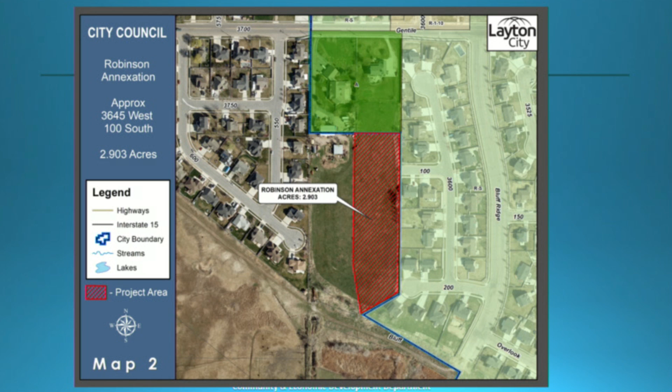Any other questions? Okay, seeing none, this actually brings our consent items to a conclusion, so I'll look for a motion for adoption of the consent items as presented.

Madam Mayor, I'll make a motion that we adopt the consent items, which include Resolution 20-21, the adoption of the City Municipal Wastewater Planning Program Report, the bid award for the Kays Creek DNRG Trailhead, and the Robinson annexation, which is 2.903 acres. Second. Okay, it's moved and seconded. All those in favor? Aye. Okay, thank you very much.

Okay, with that, we'll go ahead and move into our public hearing portion of our meeting. And again, Mr. Wilkinson will be presenting that item, which is the plat amendment for Gentile Station subdivision. Thank you, Mayor, Council. This is a public hearing. I did want to mention at the beginning of this hearing that the applicant is not in attendance tonight, but he is available by phone if we need to have any questions answered, and is viewing this through the broadcast.

This is a request for an amended plat, which requires a public hearing before the City Council under this circumstance. This is a development that you've seen probably as you've driven on Gentile that's going forward. As the development moved towards building permit, it was noted that there were some discrepancies between the plat and some of the architectural designs for the buildings. The applicant has come into us.

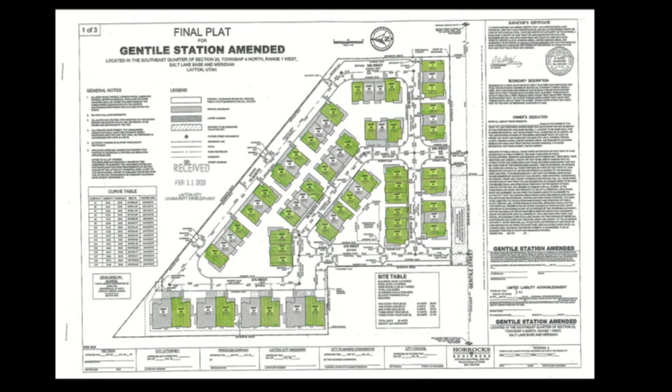Okay, I'm going to look back to our technical team and see if there have been any other additional questions that have come in, or any questions whatsoever regarding this Gentile Station. Okay, very good.

Council, are you comfortable with closing the public meeting and making a motion on this? If so, I'll look for somebody to take some action. Madam Mayor, I make a motion that we close the public hearing and approve the plat amendment for the Gentile Station subdivision plat amendment, approximately 280 West Gentile Street. Second. Okay, it's been moved and seconded. Since this is a public hearing, we do need to take a roll call vote.

So with that, I'll start with Councilman Thomas. Yes. Speaking to the mic, yes. Okay, Councilman Morris? Aye. Councilman Fitzpatrick? Okay. Councilman Bloxham? Aye. Councilman Day? Yes. Okay, thank you very much.

So that concludes our regular council meeting. However, in our prior work meeting, we agreed to - wait, before I say we need to, Gary, do we need to close the council meeting before we go back to our items on the work meeting? We do, right? Speak directly into the mic. Thank you, yes, go ahead and close your regular meeting and go back into your work meeting.

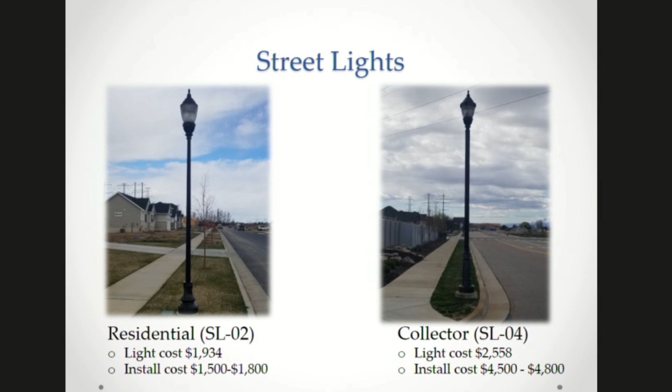As I was saying, the install costs on our collector streets is substantially higher, and that is due to the amount of conduit that we run. A lot of the residential lights, it's already in a subdivision. There's power in the park strip, and they're direct connect lights, we call them, so they don't actually have a meter to them. Rocky Mountain Power allows us to connect directly to the power on each individual one. However, on our collector streets, there's substantially more conduit, more wiring, more equipment that gets installed with each one of the lights, and so that actually drives the cost of the install up quite a bit. The install cost isn't just the wiring and everything, it's the actual work that the contractors we hire do in order to make those connections.

So we do have a couple different lights as well. The one on the screen there, the SL-03, we call those our specialty lights. You'll see those down on Main Street near the UTA train station at Layton Parkway. They're quite a bit of money because they actually have two fixtures on the top of that head, so it doubles the cost of the fixture. They run about the same cost as our collector roads, as well as the arterials. Those are the ones you see on Layton Parkway and some of our bigger streets, the teardrop design, we call them. Those lights are $3,800 a piece, basically because they're a larger light with the mast arm and things like that.

So I want to go on to— Can I ask you a quick question there? Yeah. How are they metered then? So on the lights that are part of the— sorry, I've got the auto advance going on here. Let me turn that off.

The way they meter them is we design these systems, then we'll have a meter, an actual power meter, that is installed with the lights. Those lights will be daisy chained together, they call it. So we'll have one meter that will power the lights for an entire section. Maybe from Angel Street out to 2200 West or something would be on a single meter. So sections of lights have different meters at different locations.

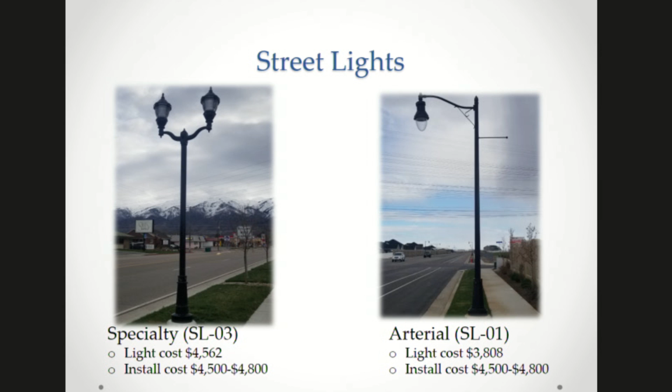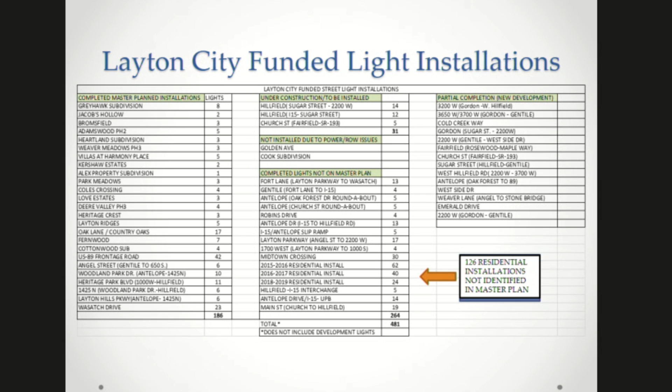I wanted to go over the residential master plan lights. We had the list for year 1, 2, and 3. These are the only listed residential streetlight projects on our list, and of those, only 9 have not been installed. Golden Avenue was not installed because of right-of-way issues where we don't have the property, and we haven't pushed that issue yet to try and purchase that right-of-way. The Cook subdivision has different circumstances. We felt like we've done a pretty good job installing the lights on the master plan in the residential neighborhood, and we also added 126 other lights that were needed throughout that area.

Didn't you say those 126 were not installed?

No, they were installed, but they were not on the original master plan. They were specifically put in as a project for residential install lights, so that we could get those into places where there were not lights or adequate lighting identified.

I was going to show, I have a spreadsheet, and we've gone through the list of projects. There's quite a few projects. Sorry, I've got to get used to standing at the mic here. There's quite a few projects we've done and completed that are on the list, and quite a few that were on the list for roads like Gordon Avenue, 3200 West, and 2200 West, where the development has not occurred yet.

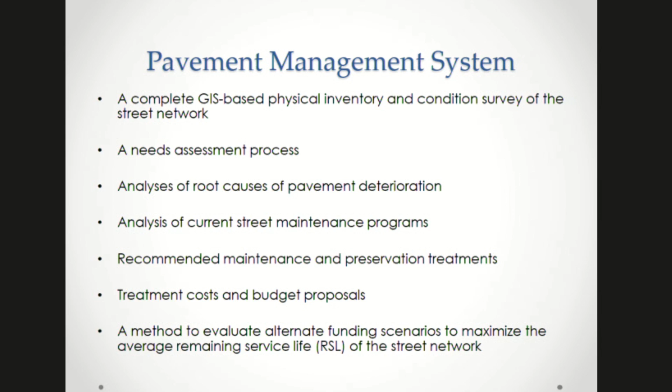So just a little bit of FYI knowledge for the council and mayor: the functional classification of our roadways, or what we term our roads - we have about 20 3/4% arterial roads, 7% collectors, and almost 73% of our roads are considered local roads. That's important because the treatments on our arterials and collectors are vastly different from our local roads. Local roads tend to sit and bake in the sun and don't see a lot of truck or heavy traffic. But our arterials and collectors carry a lot more volume and bigger vehicles, so they get a little bit more of a beating, I guess you would say.

Conventional practice was that you do a preventative maintenance treatment and rehabilitative treatment on the roads during its 20-year service life. If you did nothing to the road and just let it sit there, they would consider that you had 20 years of service life left. But if you do these preventative maintenance and rehabilitative treatments, you can extend that 20 years out into the future and save a substantial amount of cost, because the most expensive treatments you have are reconstructions of the roads and basically replacing the pavement structures.

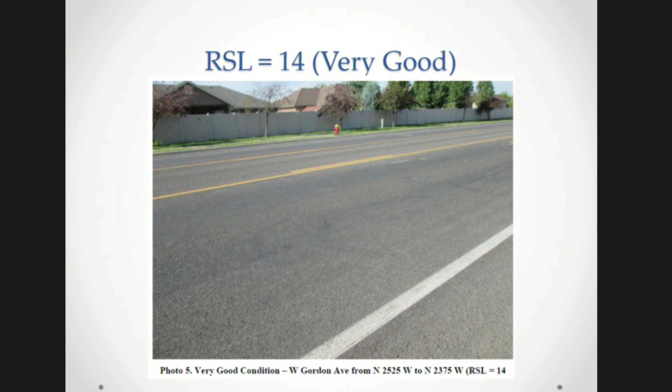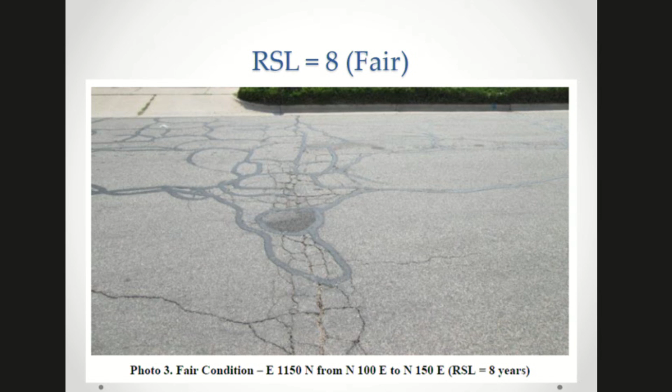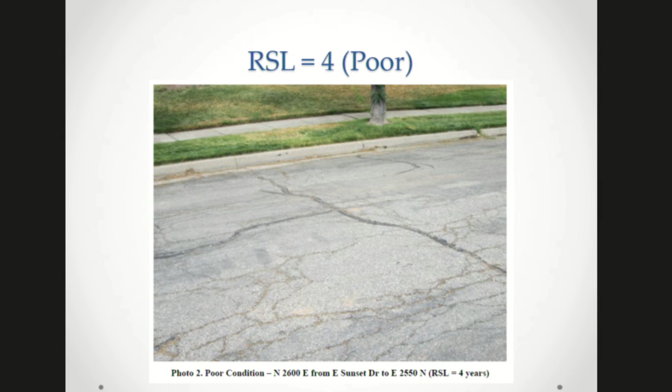This is considered fair. I know it doesn't look like it's fair, but structurally, you can see there's kind of that problem in the middle there, but the remaining pavement around it is not really deteriorating and failing at this point, so there's some treatments you could do to fix that. Now, up there on Sunset Drive, this is considered a poor road. It has a remaining service life of 4, mainly due to all the cracking and the fact that it's not sealed, which has caused some of those cracks to propagate and be a problem. And then this would be considered a failed road section.

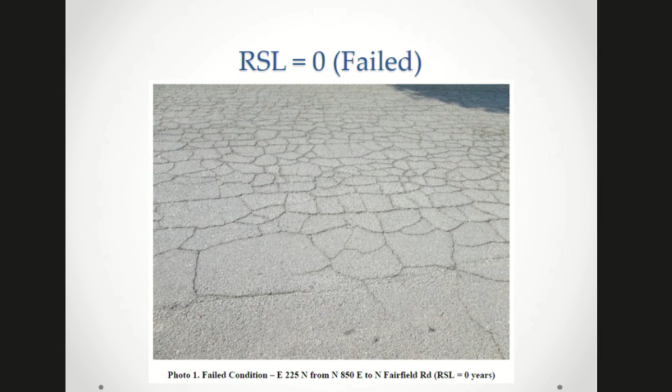You can see all of that. We call it alligator cracking, but that's a fatigue crack that's basically showing us that the road has lost its structural integrity with the base and the pavement. And the other thing I need to point out is just because you get to 0 doesn't mean you can't drive on the road. It just means that for the purposes of our assessment, the road has met its usable service life, and the treatment at that point is a reconstruction and a brand new surface being placed on the roadway.

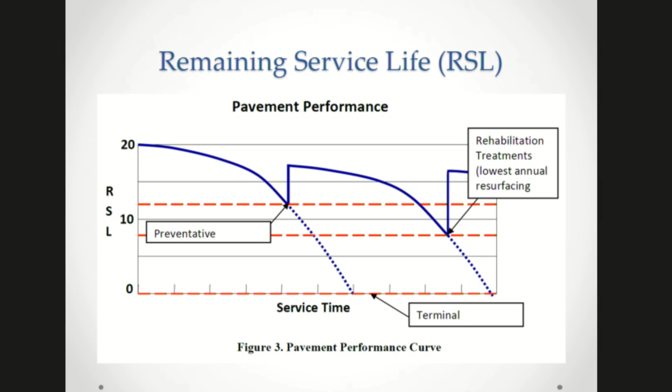Why do we do pavement preservation? As you can see, the blue line represents the performance curve of the asphalt. At 20 years, you can see it's good, and then it ticks down. You get down to about 11, 12 on the line, and then you do a preventative treatment. The dashed blue line indicates what would happen if you just left the road to fail. But if you do a preventative treatment, you can push that RSL back up, and you get a little bit more life out of that, extending that curve. Then you get down to a rehabilitation treatment, and you push it back up, so you're trying to do that to avoid those expensive reconstruction costs that need to occur at some time in the life of the pavement.

So again, the RSL is not affected by the appearance. If it's black, it doesn't mean that it's beautiful or anything. It just means that we've had a treatment on it. But sometimes roads sit in the sun and they oxidize and turn a little bit gray. That doesn't mean that they're failed or that they don't have the structural integrity in the road. It just means that sometimes people don't like the look of the road as it sits and oxidizes. But the responsible maintenance program builds around the fact that you're trying to improve that service life of your system overall and prevent getting to the point where you have to reconstruct roads because you've neglected them in an effort to beautify the pavement instead of using it for what it's for.

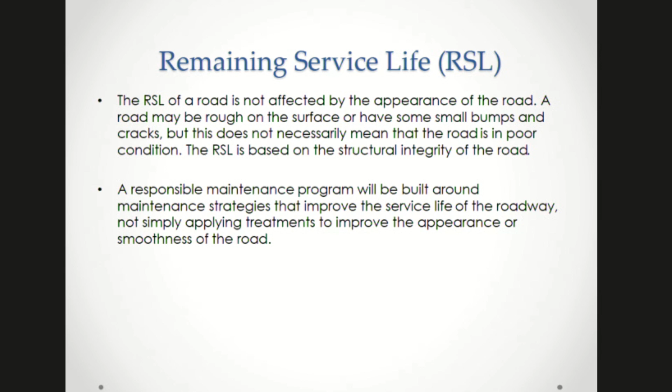The preventative maintenance is our seals and other types of coatings that go on top of the pavement. They don't necessarily add any kind of structural capacity to a roadway, but they seal them up and prevent either the sun from oxidizing and damaging the roads, or water from entering in and damaging the subsurface components. They're about a fifth the cost of rehabilitation, and about a tenth the cost of reconstruction. So when we go out and do a lot of the slurry seals and crack sealings, they're significantly cheaper than having to put brand new pavement down.

Rehabilitation treatments are a little bit more aggressive to try and solve the problems. They are used to add structural capacity to a roadway. So if the pavement is failing due to cracking or other things, a lot of times we will do a 2-inch mill and overlay. That's considered a rehabilitative treatment. They do cost 2 or 3 times more or less than reconstruction, but they're substantially more than preventative maintenance.

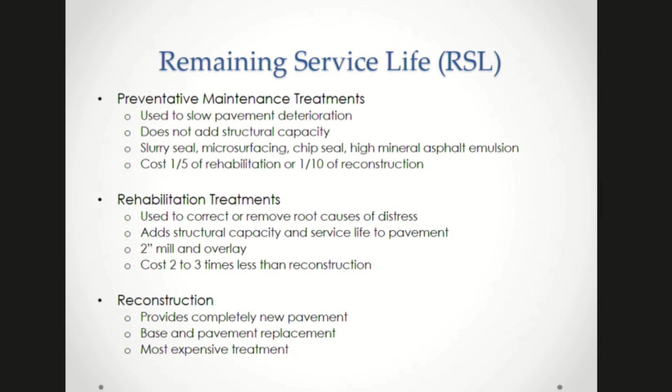And then reconstruction is the least desirable. It sometimes is necessary, but basically you get a new pavement section. You usually have to replace all the base and additional subgrade in order to build the pavement structure back to what it is required to be in order to provide that 20 years of remaining service life, but it is the most expensive.

As you're looking at that list, it's a pretty substantial list. We don't use every one of these treatments because some of them just don't work well here in our area. Some of the climate issues we have don't allow for every one of these to be used. Plus, it's kind of hard to manage that many treatments when we have some specialized contractors that come in and provide pretty competitive pricing for us.

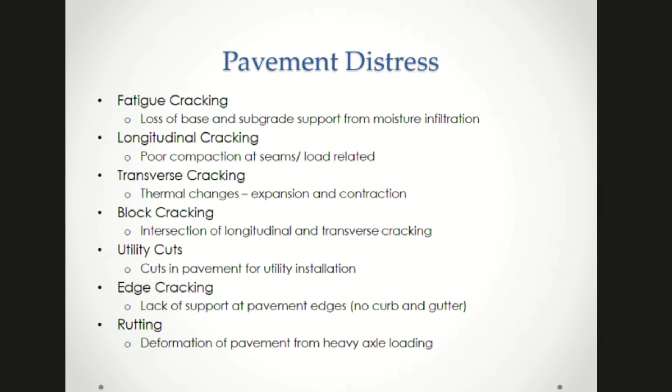I told you guys would get an education on this. This is good. Are we gonna? I'm just trying to keep you awake. Can we get this copy sent to us? Absolutely, the presentation, yeah, I'll make sure Kim has this, and I'll provide you guys all a copy of it. I do have the full report, it's 205 pages. The first 40 is the report, and the rest is all of the... Yeah, hey, it's better than Congress. I'll take page 1 and 7. You want page 1 and 7?

Perfect. So just to tell you how the pavement is assessed, this is the sheet that the college students use, and I'll be honest, as a college student I don't know that this would be that exciting, but it's actually really informative, and it helps you really understand what happens to roadways and pavements as a civil engineering student. They have this chart with all 6 of those different distress ratings on it, and there's a chart on each side. I'm going to zoom in and use fatigue cracking because it's the one that shows up in our city the most.

Basically, the way you look at it is you look at the extent of the fatigue cracking, and you rate it either low, medium, or high, and then you go to the severity, which is low, medium, or high, and it's based on how often it occurs and the size of the cracks. That number on the chart on the right actually equates into an RSL. So if you picked medium extent and medium severity, you'd have an RSL of 6. If you had low and low, you'd be at 10, and if you had none of this, then you'd be at 20. Each one of those different categories has a different RSL chart with it.

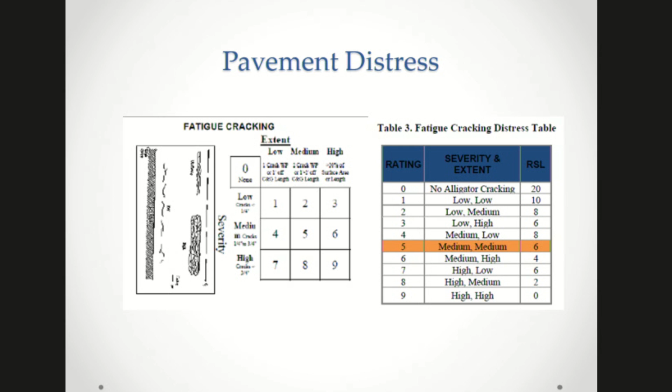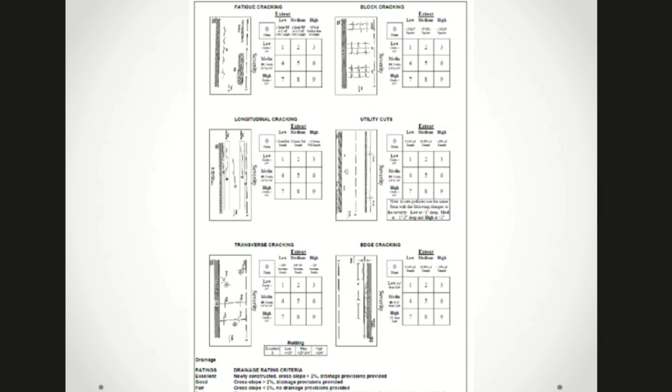I'm not going to go through each one of those charts. Every one of those charts is the same, other than the way that the distress is calculated, and then they use that chart to determine the result. So if you have multiple distresses in a road, say you have longitudinal cracks but also fatigue cracking, whichever distress is the worst or gives you the lowest RSL, that's the governing distress on the roadway.

So they went through the whole city, and they said, this is what you have. What we found is just over 42% of our roads have fatigue cracking in them. What that means is that we need to get them sealed up and keep the water out of them so that they don't continue to deteriorate.

The longitudinal is pretty high. The transverse is really high from the standpoint of the roadways that sit and just bake in the sun. The residential roads, with thermal expansion and contraction, you'll see cracks every so often because of that transverse cracking.

The good news is we have 11% of our city with absolutely zero distress in them. The block and the edge cracking didn't even show up either. The patching is what would be considered the utility cuts or other patches that we've had to make in order to prevent the potholes from appearing, and then 2% are pothole related.

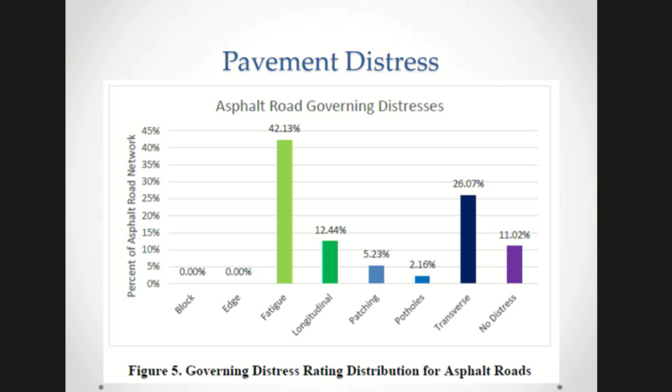So what does that all mean for us? The average RSL is 11 years for our roadways in Layton. The average RSL for Utah cities surveyed since 2002 is 10.89. So we're very average when it comes to our system.

That chart down below shows where our roads fall. The good news is that about 80% of our roads are in the fair to excellent condition. About 65% of those are in the good to excellent condition. The challenge is that poor to failed condition - those are the roads that are going to cost us a lot of money to fix in the future. The real silver lining is that we only have 0.32% in the failed condition, so that's actually very good for the assessment that we do.

The recommended pavement preservation program is one in which the RSL will be 10 and less than 3% would be in that failed condition. So we do meet that criteria.

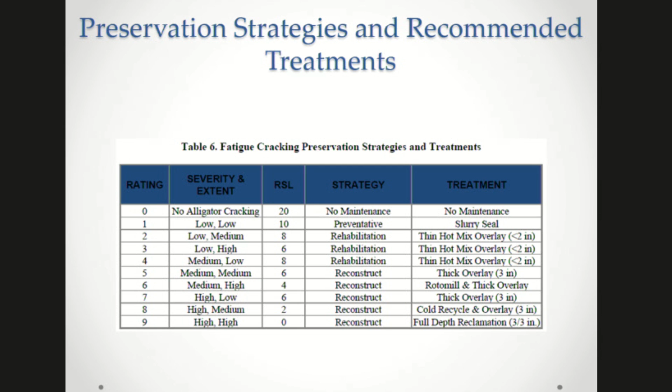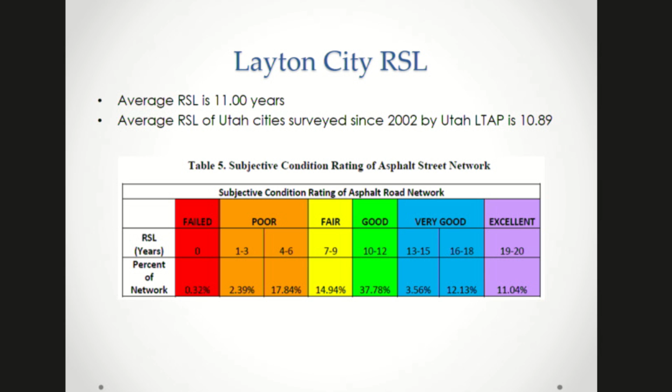You'd see there's a 3-inch overlay, rotomill and thick overlays, slurry seals, thin hot mix overlays, all kinds of different treatments we can do to preserve our roads. The goal is to push our roads from the fair to good category, keeping them from dropping into poor by doing these preventative or rehabilitative treatments, so we can add service life without spending money on reconstructs. It's about trying to keep things moving to the right on this graph.

Some of the challenges, and what the report pointed out, are that the cost of these treatments has increased significantly over the last 10 years. The price of asphalt has gone up, and the cost of everything in construction has gone up. Unfortunately, we haven't seen a lot of B and C gas tax funding increases over those 10 years. So we're asked to preserve more roads with the same amount of money as 10 years ago, while treatment costs have all gone up.

This puts us in a tough position where we have to maximize our money and do what it takes to keep roads from entering that failure state, because we're spending a lot of money on a reconstruct when we could probably put a pavement preservation down and treat triple or quadruple the amount of roadway.

The options LTAP provides are to find other sources of funding, let some of those lower roads go down to zero and fix them when they get there, or figure out a solution. That's what we've tried to do: come up with a program that keeps our roads at the best RSL we can reasonably maintain without wasting money on high cost reconstructions until they're absolutely necessary.

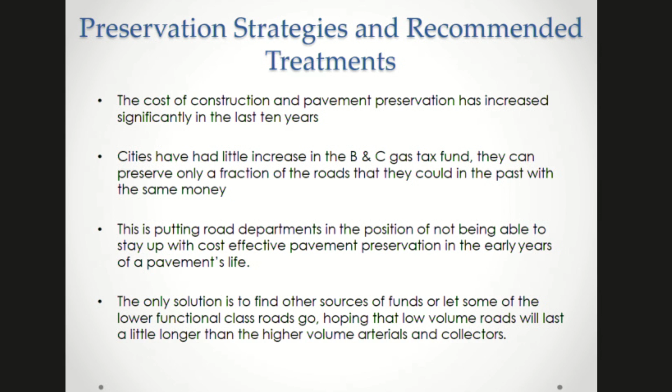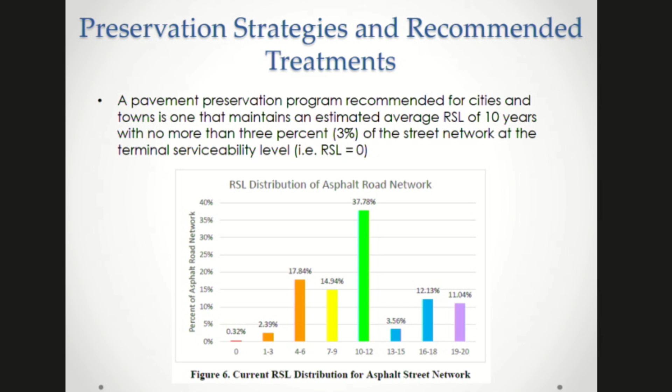We looked at what would happen if we did a bond and fixed a whole bunch of roads all at once. You get a really big jump in year 1, and then it levels off, and you actually end up worse off than if you just spent $4.5 million a year, because of the interest you're paying on those loans.

We looked at $4 million a year, and that puts us at about 11.5. Then we looked at $3.5 million, and that puts us right below 11, which would keep us in the same place we're at now.